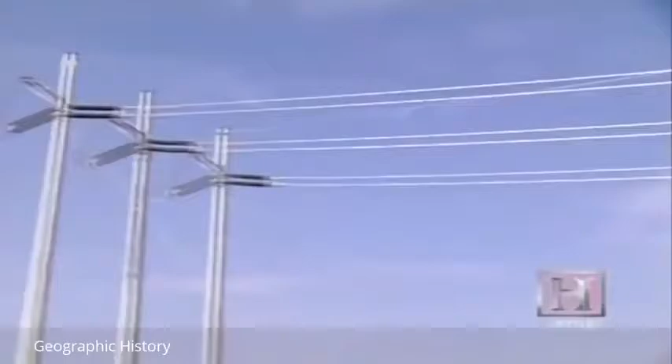Over the next century and a half, we took a world which had dominated us and transformed it into this: an electrified environment which responds to our every need. We control our climate, process information, and tend to our health with power that flows hundreds of miles across an interconnected transmission grid that encompasses the entire country.

Electric current, the flow of charged electrons, intimately influences how we live, yet most of us understand little about how it works.

In 600 BC, the Greeks first discovered that static electricity could be generated by rubbing amber. It wasn't until the 18th century, however, that Benjamin Franklin theorized that electrical fluid might be composed of particles. By harnessing this flow of electrons, or current, inventors and industrialists more than a century later laid the foundation for what would become the colossus of electrical generation, the modern power plant.

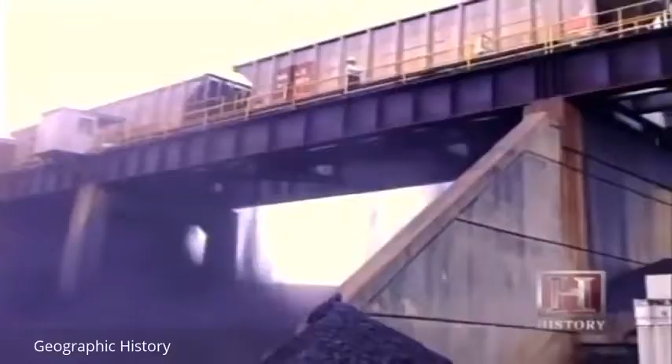It can be anything from a red-hot behemoth that, once started, consumes trainloads of coal without interruption for years. Or it might be a nuclear plant, incongruously perched at the edge of the shimmering Pacific Ocean, a plant that on its own produces 20% of Southern California's energy.

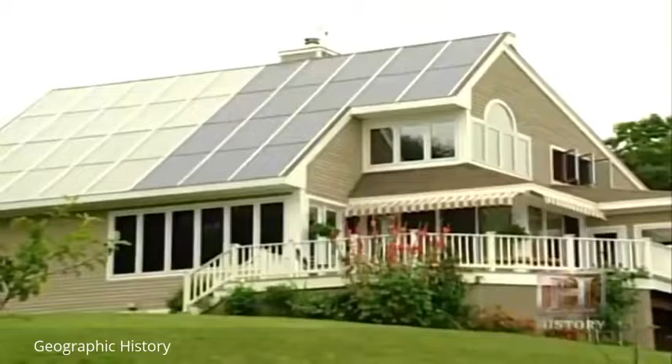Or maybe it is simply this: a house that generates more energy than it consumes and returns that surplus to the electrical grid for public use. A new model for the future of power plants.

But whatever guise contemporary power plants take, the basics of their design and their integration into commercial and domestic life were forged more than 100 years ago in a conflict between two giants of industry and invention, Thomas Edison and George Westinghouse. The outcome of the fierce competition between these two men would ultimately dictate how electricity would be generated and transmitted. But their first battle would be waged over how to bring safer light to the cities of America.

Early natural gas lighting systems in homes, for example, on occasion were quite dangerous. They had no shut-off valves, so if the lamp went out, the gas would continue to accumulate in the home, and they had some major explosions in homes.

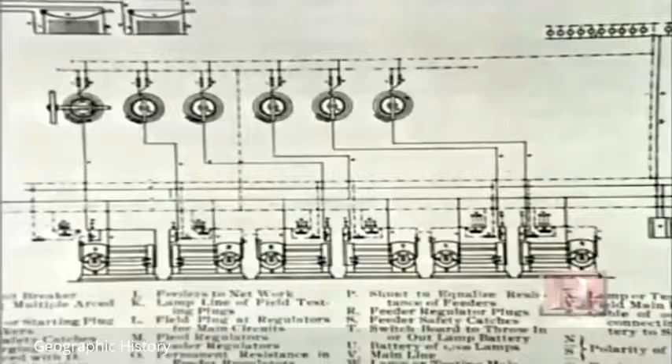In 1879, Thomas Edison invented the first commercially practical incandescent lamp with a high-resistance filament that glowed when heated by a low current. He soon followed this with designs for a complete distribution system for light and power.

On September 4, 1882, after delays and cost overruns, Edison opened the first electric utility, the Pearl Street Station, in the heart of Lower Manhattan's financial district.

Edison knew that his product was going to be expensive and would need to reach many customers. The whole reason for Edison's Pearl Street Station in New York City in 1882 was to demonstrate that electric technology could be used on a widespread basis, not serving one customer like steam engines in old factories, but many, many customers. Edison's choice of direct current technology at Pearl Street limited his power plant's range.

The major disadvantage to direct current power in power plants at the time was you could not transmit electric power very far without losing a tremendous amount of the current. So you needed a power plant every half mile or mile throughout the city.

Edison's main competitor, George Westinghouse, saw that electricity's future was in long-distance transmission. Westinghouse put his company, Westinghouse Electric, to work at perfecting a system using alternating current, which flows in reversing waves that propagate more easily and with less resistance in a transmission wire.

The beauty of alternating current is that you can generate it at a very high voltage and then step it down essentially to any voltage that you need. So you could step it down to a very low voltage that somebody would need at a house for their lighting, or you could step it down to a somewhat higher voltage that some business or some factory would need.

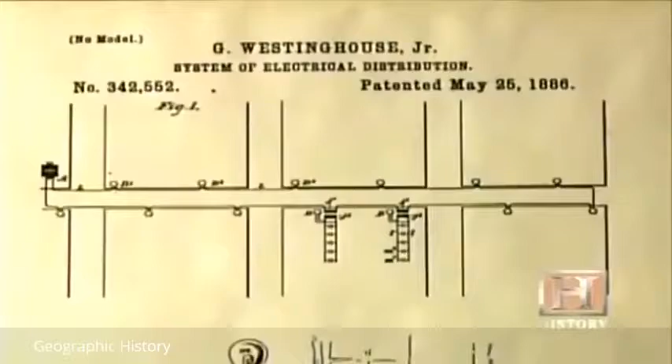George Westinghouse purchased several vital alternating current patents from Nikola Tesla, a Serbian-born inventor. Westinghouse recognized Tesla's genius and brought the inventor to Pittsburgh to work for him. Together, they designed the components necessary to alternating current's success.

In 1887, George Westinghouse invented a meter for alternating current. He thought if you were going to make alternating current commercially available, you were going to need some way of measuring what you're going to sell to your customers.

Westinghouse's aggressive pursuit of alternating current technology put him in direct conflict with Edison. It was a battle of business and technological giants, Thomas Edison versus George Westinghouse. This is called the Battle of the Currents, and it was essential because the technology that won would dominate the industry for the remainder of the foreseeable future.

With so much at stake, it's not surprising that the Battle of the Currents took a bitter turn. Edison went so far as to lobby New York State officials to have his competitor's product, alternating current, used to execute condemned men at Sing Sing prison.

I guess perhaps the lowest blow is when they were looking for a word to describe this. Today we say a person is electrocuted, but at the time they didn't have a term, and Thomas Edison suggested that they use the word Westinghoused, that the condemned man was Westinghoused. And obviously it's very, very upsetting to George Westinghouse.

But Westinghouse focused on the industrial competition at hand and left the courting of public opinion to his adversary. There was a great World's Fair coming up in 1893 in Chicago, and they asked for proposals to illuminate the fair, to light it at night, realizing that nowhere in the world had a major event ever been illuminated at night before. Westinghouse bid $500,000, half of what Edison bid, and was awarded the contract.

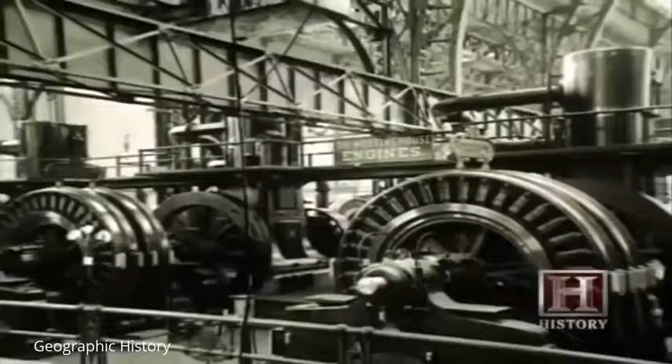He took advantage of the opportunity to promote his product, installing a complete alternating current power plant that was on display for everyone to see. It had a giant Westinghouse alternating current switchboard, and the impressive part of that was that there was only one operator. One operator could control all the electrical equipment for the World's Fair of 1893.

27 million Americans and foreign visitors attended the Chicago World's Fair of 1893. Tesla and Westinghouse made sure that they left the fairgrounds with a good idea of who was winning the Battle of the Currents. Both George Westinghouse and Nikola Tesla realized this was an opportunity to really showcase the potential of alternating current. One display had this huge word, power, and at night there were electrical currents, just like little bolts of lightning flashing all around this illuminated word.

After this dramatic success, Westinghouse was prepared for his greatest challenge, competing head-to-head with Edison for the right to build the largest power plant in the world.

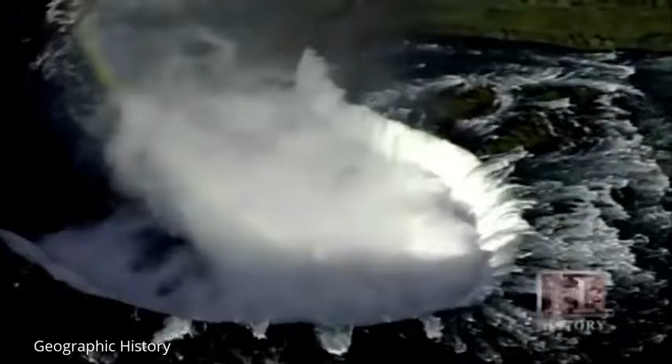Niagara Falls. For hundreds of years, men had understood that the power of falling water could be converted into mechanical energy, the energy to run mills. But by the 1880s, there was open debate over whether the falls should be harnessed with this old technology or transformed into electricity and transmitted to industry and individuals hungry for power.

If we look at Niagara Falls and the potential for generating power, it was obvious to a lot of intelligent men at that period of time that there was a tremendous amount of power in the water coming down over Niagara Falls. If it could be harnessed, it could do great things for industry.

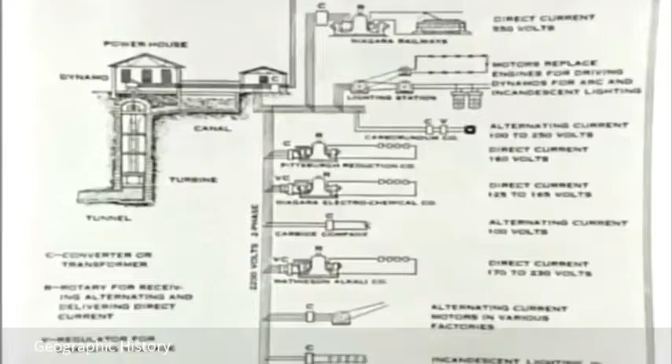The International Niagara Commission solicited plans from leading engineers to design a plant that could transmit electricity to nearby Buffalo's manufacturing interests. This was a dramatic opportunity for George Westinghouse's alternating current system. Ultimately, the decision to choose alternating current, which could be pushed much further distances over transmission lines from the powerhouse, won the day for alternating current.

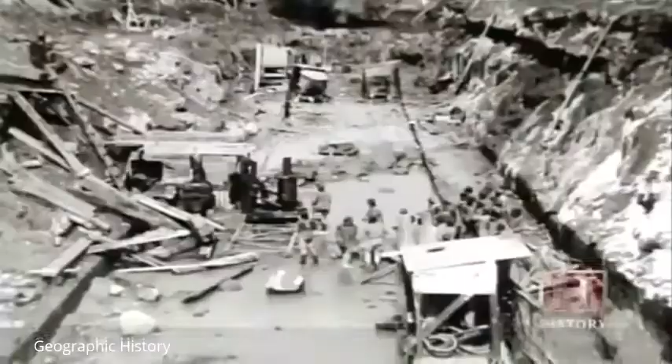It took from 1892 to 1895 to build the tunnel that would divert the force of the Niagara River to the plant's turbines. During the summer of 1894, electric cranes eased the 29-ton turbines, the largest built to date, into the wheel pits. The turbines were essentially windmill blades that could be driven by the force of Niagara's water.

When the plant was finished, water flowed through the forebays and into the penstocks, vertical pipes about 8 feet in diameter, before entering and driving the turbines, which in turn spun rotors beneath the generators. Inside the generator, a magnet spun, creating a magnetic field which induced an electric charge in a casing of copper coils, thus producing electricity.

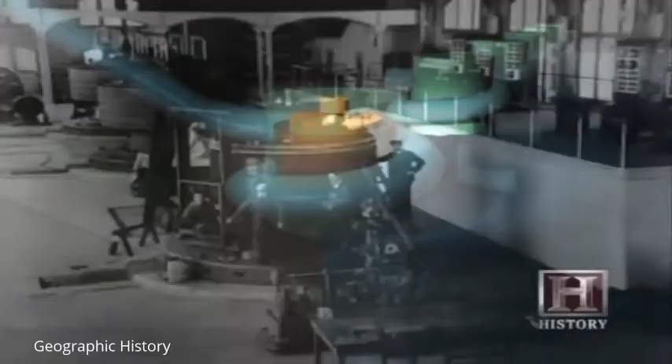In 1896, the Niagara Power Station began transmitting power 17 miles to Buffalo, New York. But it wasn't until 1901 at the Pan American Exposition on the Buffalo Fairgrounds that the general public was able to witness a large-scale display of the wonder of long-distance electrical transmission. In order to transmit electricity over this distance, transformers at the plant increased voltages to 11,000 volts, 4 times the voltage of an 1891 plant that Westinghouse had built.

Inside a transformer, an electric charge passes through one wire coil, inducing a higher or lower charge in another separate coil. Voltages multiply at the ratio of the number of turns in the secondary coil to the number of turns in the primary coil. What the Westinghouse engineers understood clearly was that large power plants, which could produce large amounts of electricity and serve larger numbers of people over a wider area, needed transformers to increase the pressure of electricity, to push it longer distances.

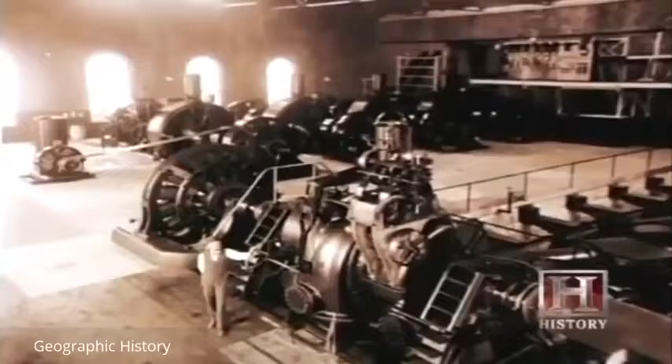The Niagara Power Plant provided not only a technical blueprint, but also an economic model that would be duplicated time and again over the coming century. If you build it, they will come. Heavy industry, in this case, would congregate around a reliable, cheap energy source.

There was a fellow in Pittsburgh named Hall who had an early process for producing aluminum using electricity. So he moved his company from Pittsburgh to Niagara Falls when the power became available. That company went on to change its name to Aluminum Company of America, and as we know today, it's the largest aluminum company in the world.

It soon became clear as electricity flowed out of the Niagara Power Plant that alternating current was here to stay. After Niagara, even Edison abandoned DC for AC technology. I think it would be fair to call George Westinghouse the father of the modern power plant. He was the catalyst, the person who had the commitment over this 10-year period of time to pull the resources together to make alternating current successful.

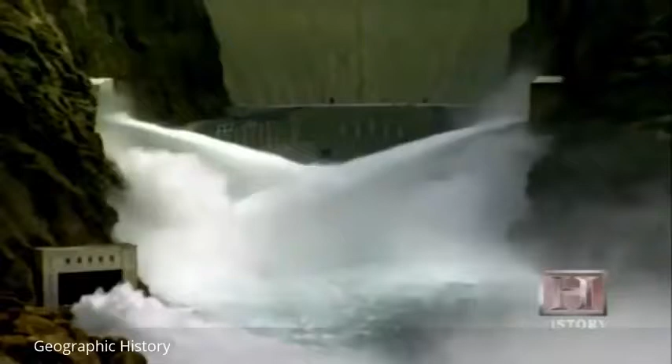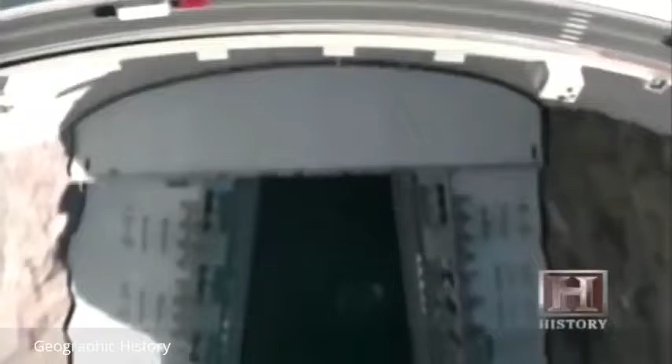In the ensuing decades, improvements in the electrical engineering of turbines, generators, and transformers would lead men to dream of a bigger and better source of water power. This dream would culminate at Hoover Dam, 40 years after the first electricity flowed out of Niagara. At 726 feet in height, weighing in at 6.5 million tons, and forming a 150-mile lake, Hoover represented a stunning increase in scale to Niagara and is still one of the world's largest dams.

Hoover's transmission voltage of 287,000 volts speaks to the engineering leap that had taken place. A number of people compare Hoover Dam with the earlier Niagara Falls installation. The difference between the Niagara Falls of the early 1890s and Hoover Dam in the mid-1930s is the improvements in technology over that period of time.

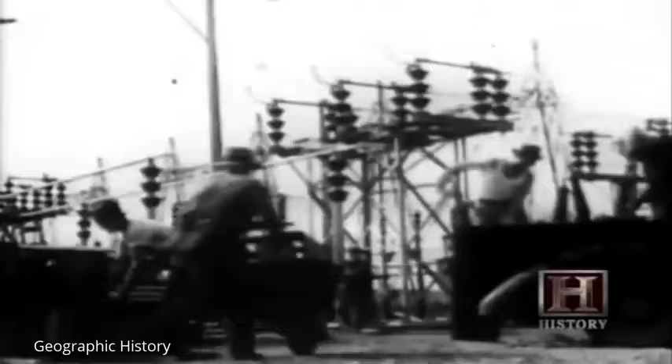Larger, much more efficient generators, and most importantly, very high voltage, high pressure transmission systems. Whereas people 17 miles away from Niagara Falls could receive electricity in the early 1890s, by 1936 and 37, when power was coming out of Hoover Dam, it was traveling over 250 miles to Southern California.

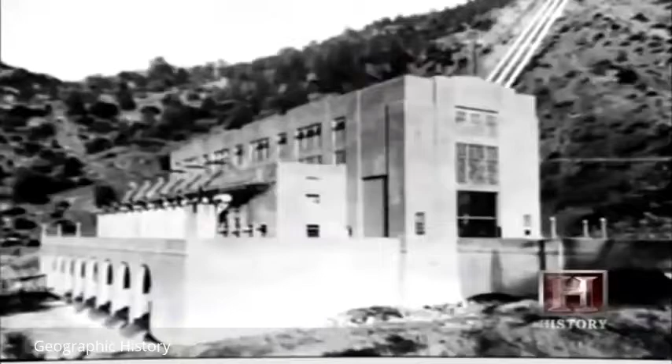In the decades between Niagara and Hoover, privately owned power companies flourished throughout the country. It did not take long for company owners to realize that consolidation was the only way to profit in an industry that required so much investment to build infrastructure.

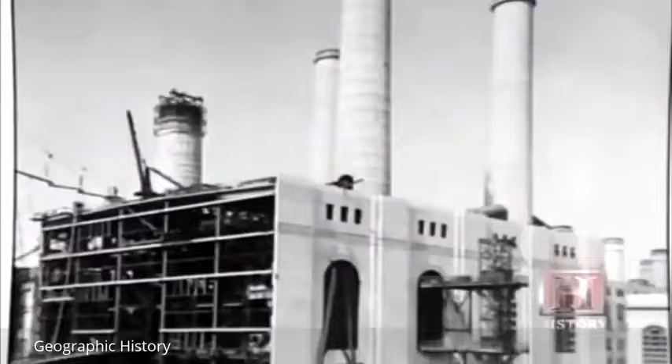Tom McCarter had been the Attorney General of New Jersey. His idea, which was very novel at the time, was to draw a line between New York City and Philadelphia and buy up all the municipal light, gas, and traction companies that existed between those two major points. By doing so, he was able to generate the critical mass necessary to go out and begin to fund the tremendous infrastructure that was going to be required to build the electric system.

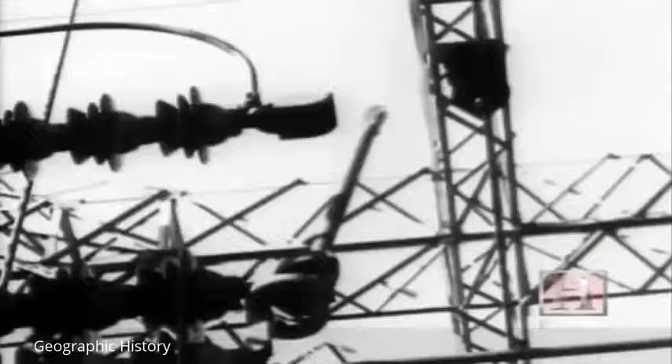It was also a major step in the growth of the transmission grid. More customers meant greater revenue. An expanding utility could afford the expense of running transmission lines, linking multiple plants into a regional grid. This system spawned the giant interstate power transmission grids that today cover thousands of square miles.

Improved transformer technology and higher voltages meant electricity could be sent farther and farther. By 1903, you had over 100,000 volt technology, which meant you could push electricity 150 miles or more. By the early 1920s, you had 220 and 230,000 volt technology, which meant literally anything within a range of about 300 miles of the power plant could receive electricity.

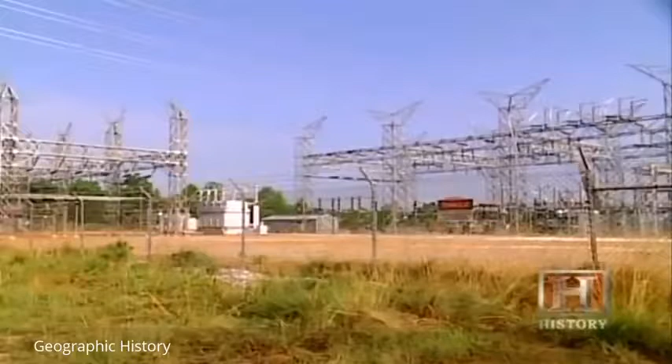The workhorse of this grid is the transmission substation, like this one outside Athens, Georgia, where the job of increasing and decreasing voltages is done.

Our network grid system is based on about 3 main voltages, and then we go to some lower voltages for shorter routes. But the network system is basically 500,000 volts, 230,000 volts, and 115,000 volts. The 500,000 volts is basically like an interstate system. It travels from state to state, and there are about 5 to 6 main arteries across the state. The 230 kV system is sort of like the U.S. highway system. There are more routes, but still not the largest number.

There's the largest number, the 115,000, which is more like the state highway system. It carries power from town to town, all over the smaller towns, medium-sized towns, and to other areas to feed different loads.

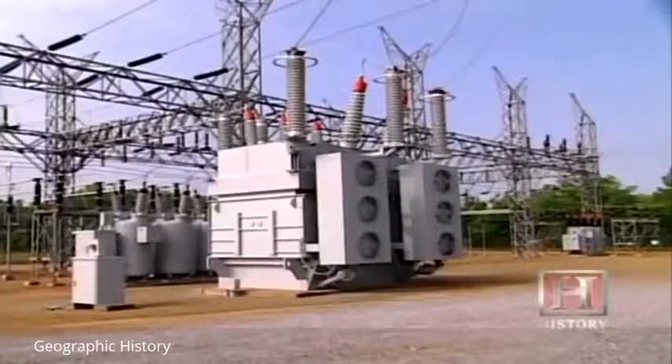Transformers at the substation alter the voltages so that electricity can be routed where it needs to go. We're standing in front of the 230 to 115 kV transformer, the big box here. The transformer converts the 230 kV voltage down to 115,000 volts, and then supplies power to the 115 bus, which is then shipped out across the 115 kV grid.

Electricity flows along the 115 kilovolt power line and gets stepped down as it nears its destination, private homes. This is a typical distribution transformer serving a home. Distribution lines run either 12,000 or 25,000 volts. It's stepped down to 120 to 240 volts to feed the house for the normal television, lights, appliances, everyday use.

This kind of everyday use has fueled the demand for power throughout the century, as consumption and desire for comfort have grown. To meet society's runaway electrical needs, utilities built their bread and butter plants.

Next, what eats 36,000 tons of coal a day and never needs a rest? On 2,000 acres in Bartow County, Georgia, sits the second largest coal-fired plant in the United States, Plant Bowen. Owned and operated by Georgia Power, the facility produces in 15 seconds all the electricity a home will use in a year.

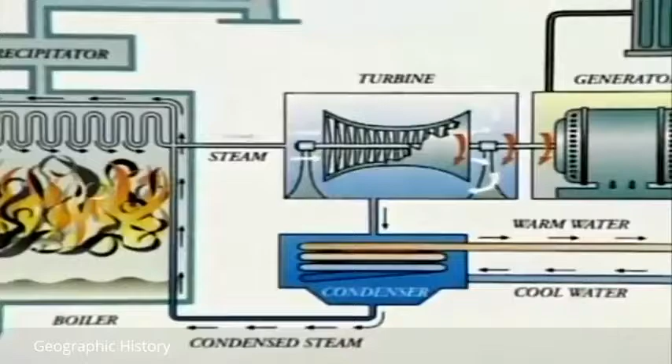Basically, the way you generate electricity: you take water, and the simplest cycle is you boil it, and you create steam, and you pressurize it with this amount of heat that you're introducing into it, and you put it through a turbine. The turbine is a simple fan, and as you introduce the high-pressure steam, it turns a generator.

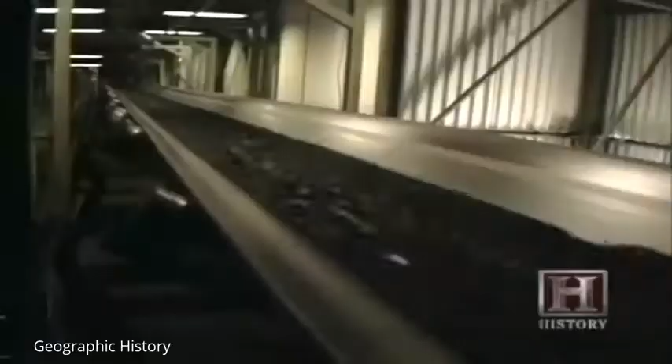But this simple steam cycle was wasteful. It would take about 10 pounds of coal to produce the amount of energy that it would take to light a 100-watt light bulb for an hour. That's a very significant amount of coal. Today, through technological changes, we've been able to bring that down to where now we're far under 1 pound of coal to produce the same amount of energy.

It took a combination of disciplines to affect this kind of fuel efficiency. You had the power plant engineers refining that process, increasing the thermal efficiency, finding out how to use fuels in a more efficient way. You had metallurgists working on piping that were trying to bring temperatures up higher. You had boiler feed pump folks working on producing tremendous amounts of pressure. All this to supply energy to a growing population and industrial base that demanded more power.

Engineers call this demand load, and this load changes depending on the season and time of day. Load is the electrical demand on our system. If you turn a light bulb on, that is putting a load on our system. It's putting a demand for the use of electricity.

The use of power goes up dramatically during the day, particularly today with air conditioning, so that you have very low levels of load at 8 o'clock in the morning. It goes up higher and higher in the morning period, and then about 3 o'clock in the afternoon, everybody's air conditioning is working at its maximum, industry is working hard, and that's the maximum peak load.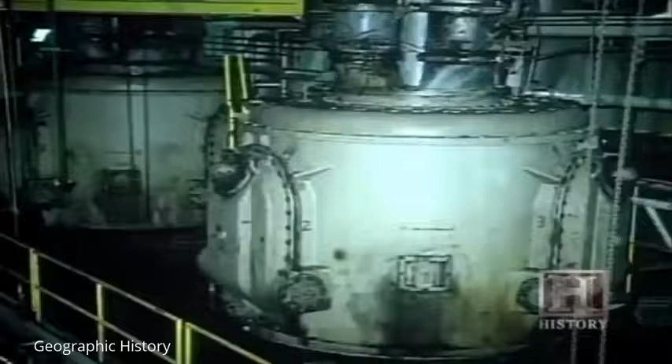Plant Bowen is what we call a base load power plant. The economics of operating it are such that it pretty well runs day in and day out, 24 hours a day. It takes 4 9,000-ton train loads of low-sulfur coal arriving from eastern Kentucky each day to supply the plant. The coal is pulverized to the consistency of talcum powder before being blown into the boilers to be burned to heat water.

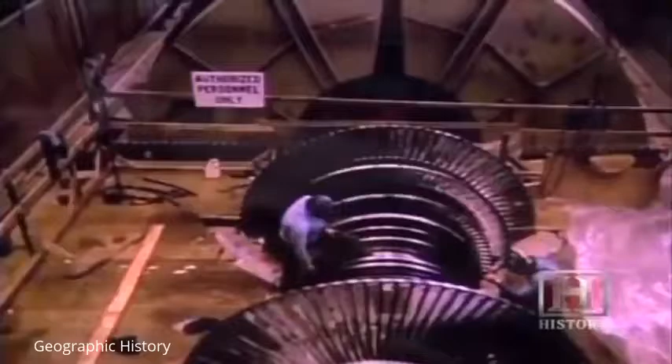It's turned into steam that has a temperature of 1,000 degrees and a pressure of 3,500 pounds per square inch. This steam is delivered to a turbine, which turns the turbine. The turbine is attached to a generator, and the generator and turbine spin at 3,600 RPMs, generating electricity which we put out on our transmission line.

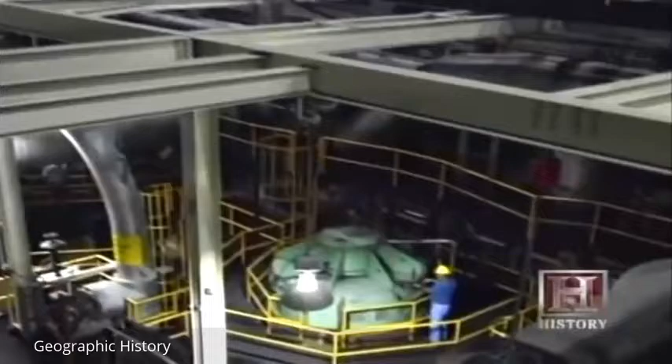Once the steam has done its work in the turbine, it enters the condenser, where it flows over 36,000 copper tubes containing water from the nearby Etowah River.

The river water absorbs heat, condensing the steam back into water so that it can be reused in the boiler. Hot river water is then cooled in 400-foot high cooling towers, each tower cooling 300,000 gallons a minute.

Not surprisingly, it is no longer possible to find communities who will welcome a plant of Bowen's scale, with its looming 1,000-foot high stacks.

As a result, utilities like Georgia Power have developed peaking facilities with much smaller footprints, both in terms of land use and environmental impact. Combustion turbine plants like Plant Dahlberg in northeast Georgia burn natural gas or fuel oil instead of coal, in what is essentially a souped-up jet engine.

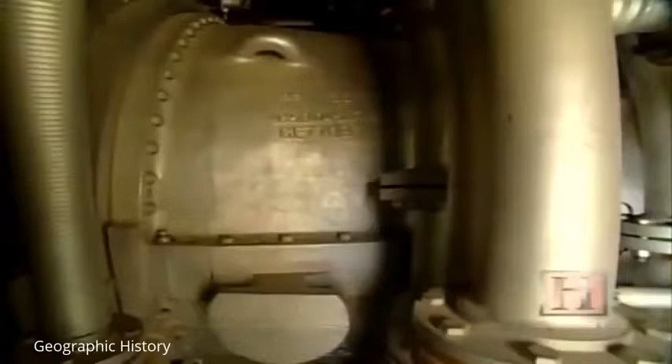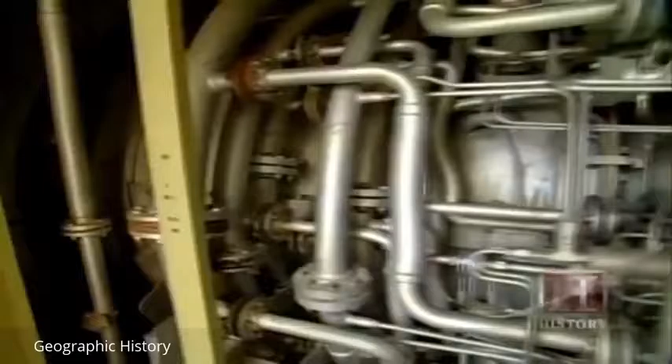The gas turbine engine uses hot air and not steam to produce electricity. Fuel mixes with air, is burned, and the expanding gases drive the turbine. Once the turbine spins, the process is much the same as in a steam cycle plant.

The technology for this type of unit with the combustion turbine is very similar to what you would see on a jet engine. The jet engine has a compressor that brings air in, compresses it, burns it, and produces the power used in thrust. This is a much larger machine doing the same thing. It's been equated to a jet engine on steroids.

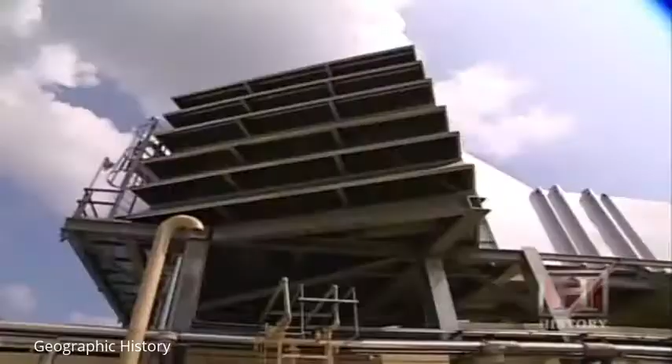Plant Dahlberg's 8 units combined produce about 600 megawatts of energy, less than the output of a single unit at Plant Bowen. As a result, the turbines are only used to produce supplemental electricity when it's needed, to get you through the high demand period of the day.

Today, the energy market and societal pressures for safer, cleaner power have created a demand for smaller plants that are more evenly distributed on the landscape. This is changing the shape of an industry whose motto had always been, bigger is better.

Built during the years that preceded the Depression, those bigger plants produced more power, but in the 1930s and 40s, rural farms had no way of tapping into that power. Remote, and expensive to reach with transmission lines, they simply were not on the grid.

Investor-owned utilities primarily did not want to go to the cost of providing electricity to rural customers, because you would face the cost of building power lines, in some cases 100 miles long, that would only serve maybe 4 or 5 customers. No return on your investment.

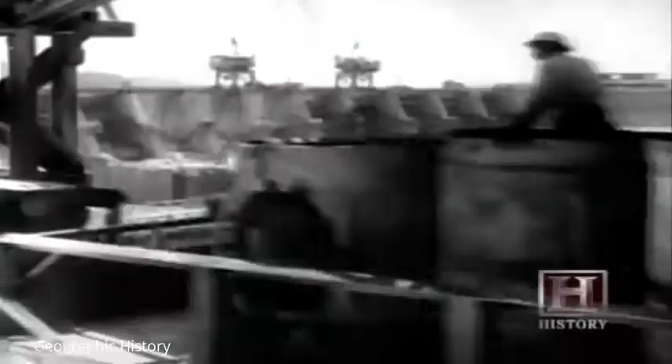President Roosevelt and the Congress established the Tennessee Valley Authority in 1933, and the Rural Electrification Administration in 1935. The agencies shared the goal of bringing electricity to rural America, where only 10% of farms had power.

The TVA ostensibly began as a flood control effort by the Army Corps of Engineers, but it was quickly used as a way to find new sources of hydroelectric generation on the rivers of the area. Dams were built, ultimately totaling 42 in the system, and a massive hydroelectric power project was launched, which grew to a total capacity of 4 million kilowatts by the 1970s.

By this time, the mission of the REA and the TVA had been accomplished. 98% of all farms in the United States had electric service.

Once the TVA had exhausted the hydroelectric possibilities of the river basin, administrators turned their attention to other forms of power. In later years, the TVA moved away from its hydroelectric base and actually was a pioneer in the scale-up of some of the coal-fired boiler technology that we see today, and became a diehard proponent of nuclear power in the 50s and 1960s.

Next, the half-life of nuclear power. How a technology grew up and got old before its time.

In 1942, Enrico Fermi created the first self-sustaining nuclear chain reaction in a lab hidden beneath the football field at the University of Chicago, and in doing so, launched the atomic age.

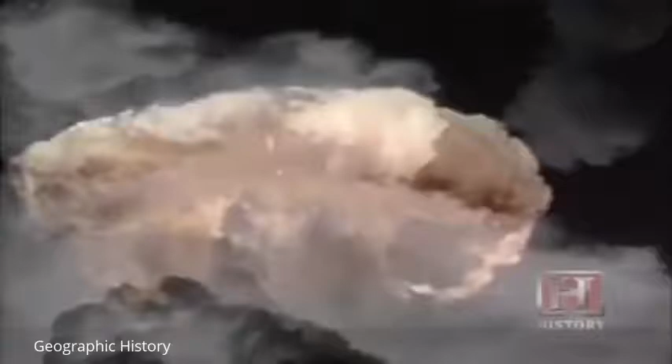In an atom bomb, a sufficient quantity of weapons-grade plutonium is imploded by a TNT charge, initiating a chain reaction, or fission explosion.

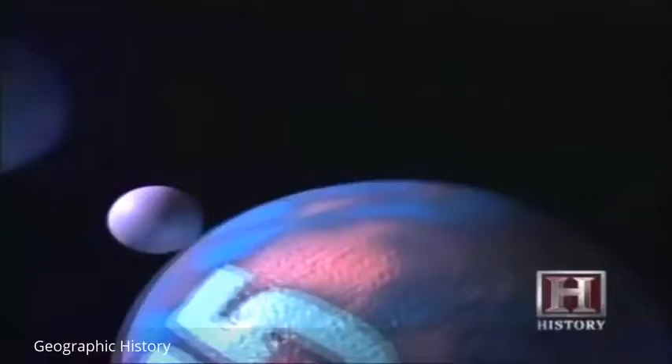Fission is the process in which natural elements that are radioactive in nature, like uranium, are bombarded with neutrons, and they split into other elements. When they split into other elements, they release energy.

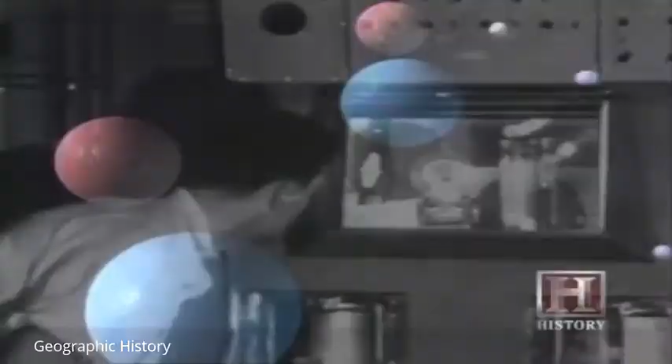Fortunately, not all nuclear reactions end in devastation. It was the peacetime harnessing of atomic energy that spawned the nuclear power industry. The first privately financed and commercial nuclear power plant built without government help was the Dresden 1 facility outside of Chicago in 1959.

If you think of the Manhattan Project and the atomic bomb and the ending of World War II, the advancement in that technology over a 10 to 15-year period was pretty dramatic. Today, more than 100 nuclear power plants are operating in the United States, supplying 20% of the country's energy needs.

San Onofre is what we call a baseload power plant, which means it tries to operate 24 hours a day, 365 days a year at full power output, which in the case of each of these reactors is a little over 1,100 megawatts of power. The San Onofre Nuclear Generating Station in California's San Diego County supplies energy for 2.5 million homes and businesses.

Fuel is uranium. Uranium has the natural ability to fission, which means the nucleus of the atom of uranium can literally tear itself apart. When it does that, it releases a tiny amount of heat, but it also releases additional neutrons.

Inside a pellet of uranium, there would be billions and billions of atoms. So in very short order, we can get a chain reaction going in the uranium. So when you have a billion atoms releasing a little bit of heat, it becomes a large amount of heat.

This heat is released inside the nuclear reactor, which is housed inside a containment dome. The walls are 4.5 feet thick concrete and steel, and in theory would be able to survive any man-made or natural disaster, including earthquakes. In this stress test, the wall withstood a direct impact of an F-4 Phantom jet.

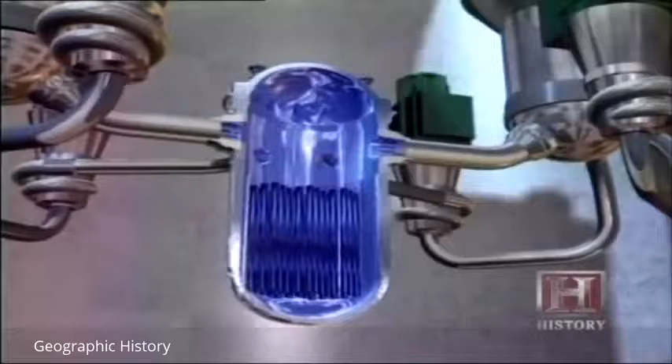The reactor and its circulating system are filled with water, which submerges the fuel core. If you were to put a thermometer on the core, the fuel assembly itself, it would be in excess of 600 degrees. As the water circulates by that hot uranium, the water gets hot, it comes out the other side.

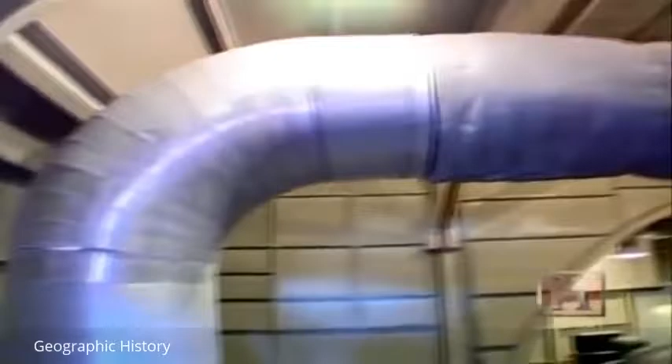It goes into two very large devices called steam generators. The steam drives the mechanical turbine, causing it to rotate at 1,800 revolutions per minute. That in turn turns an electric generator, and electrons are forced through wires, making electricity to power homes and businesses.

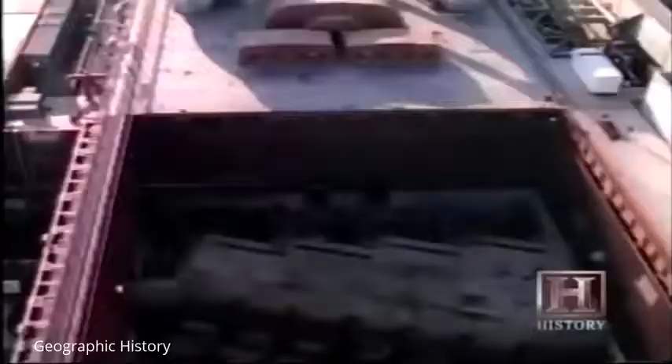The row of turbines and the generator together weigh in at 800 tons, or the equivalent of 800 Volkswagen Beetles. But despite this massive scale, it's still a fundamental process.

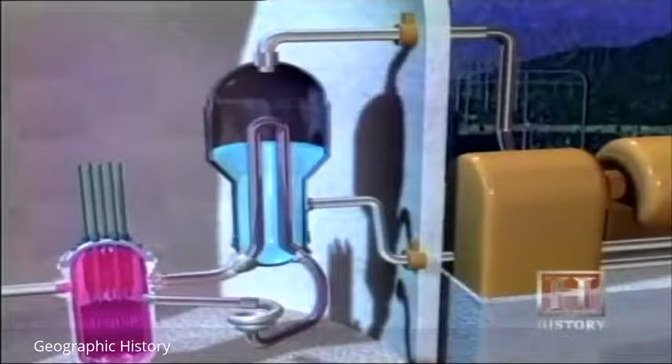As radioactive water from the reactor flows through the steam generators in a closed system, it heats clean water in a second closed system before it returns to the reactor. The clean steam drives the turbine and is then cooled by ocean water before returning to the steam generator, where it will again be turned into steam.

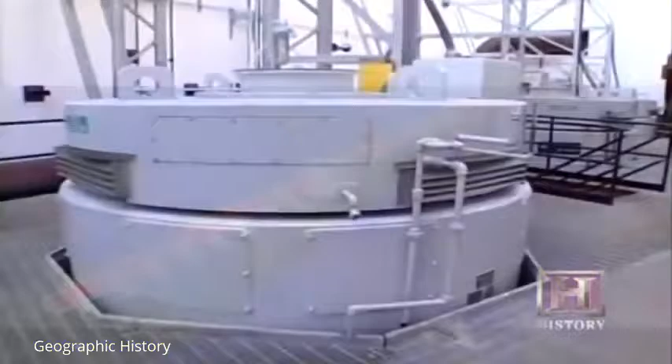Behind me over here, obviously, is the Pacific Ocean. About 3,200 feet offshore, we have a 16-foot diameter pipe in the ocean. When we turn on the pumps, we draw in about 1.6 million gallons of water per minute.

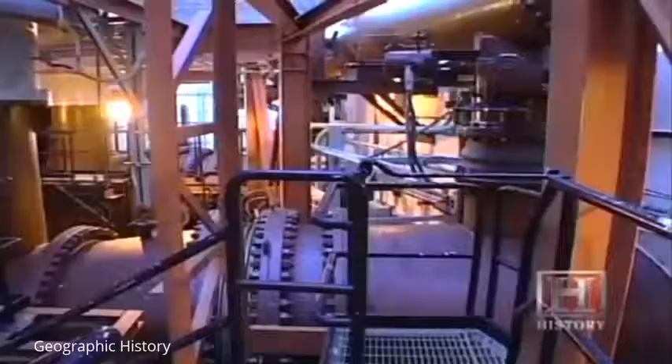The pumps are run by 4,000 horsepower motors. That's the equivalent of 6 NASCAR cars running at full speed. Each pump is capable of draining an Olympic swimming pool in 15 seconds.

If for any reason engineers needed to stop the nuclear reaction, they could do so by lowering an array of control rods into the core. The control rods absorb the atom-splitting neutrons that are driving the chain reaction, bringing it to a halt.

But the surprising aspect of this plant is that, to a great degree, it runs without stopping. It can run for 2 years without needing new fuel at full output. San Onofre Unit Number 2 has been operating for about 530 days consecutively.

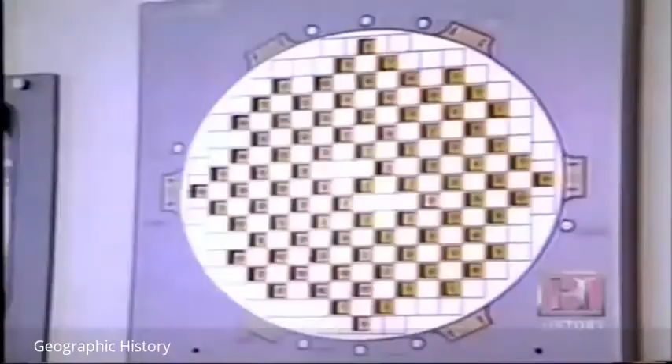If this was a natural gas plant or an oil plant or a coal plant, we'd constantly be needing to bring in trains or pipelines bringing in this fuel product.

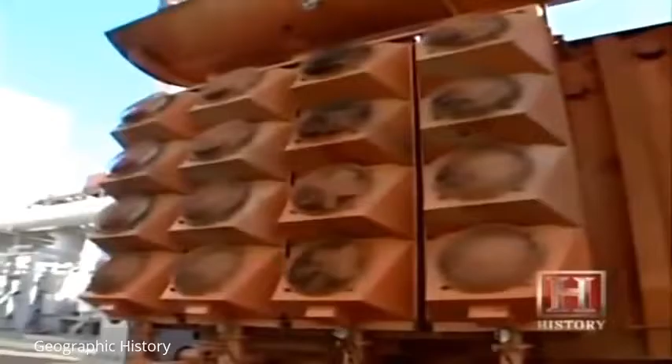Outside, transformers step 22,000 volts of electricity up to 220,000 volts, essentially pressurizing it for transmission throughout Southern California.

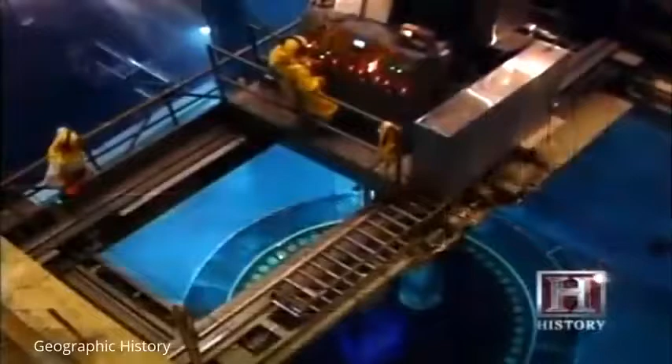Although nuclear power is a relatively new and seemingly successful technology, it has yet to recover from an accident in Harrisburg, Pennsylvania. The most significant event from a safety standpoint that has ever happened in the U.S. nuclear power industry was the Three Mile Island accident in 1979.

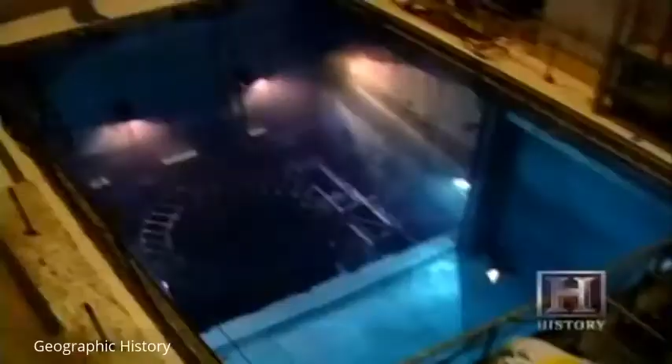This was literally a brand new reactor with brand new operators. At 4 o'clock in the morning, because of a combination of human error and mechanical design, they allowed the reactor's core, the uranium, to be uncovered for several hours. Without any water to keep the uranium cool, the uranium overheated and actually melted.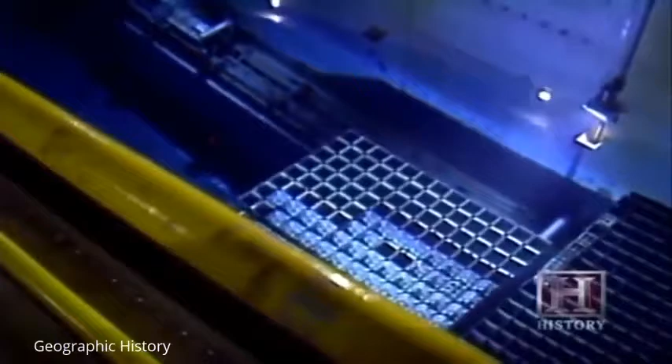Evidence suggests that fallout from the accident was low, but the public relations setback was immense. No new plants have been built since.

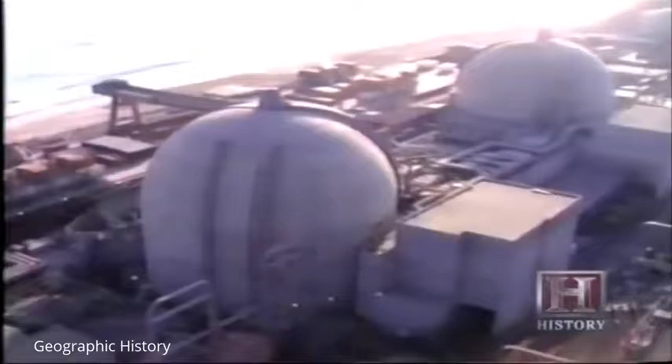However, most nuclear power advocates predict that the industry will stage a comeback. In my opinion, there will be a rebirth of nuclear power. It's not a question of if, it's a question of when. And proponents suggest the question of what kind of waste we want in our environment may well be nuclear power's most convincing argument.

Nuclear power in the United States supplies about 20% of the electricity in the whole United States. That would probably surprise most people that it's that high. In that 20%, that avoids, on a yearly basis, the emission of about 177 million metric tons of greenhouse gases that would be emitted into the atmosphere if that 20% nuclear power was replaced, say, with coal or oil.

I would say that in the next 10 to 20 years, you will see the percentage of nuclear power rising, because that's a good way to address the global warming issue, and you do not have any solid waste other than the radioactive waste that you have to deal with. But I feel like we'll figure out a way to manage that problem.

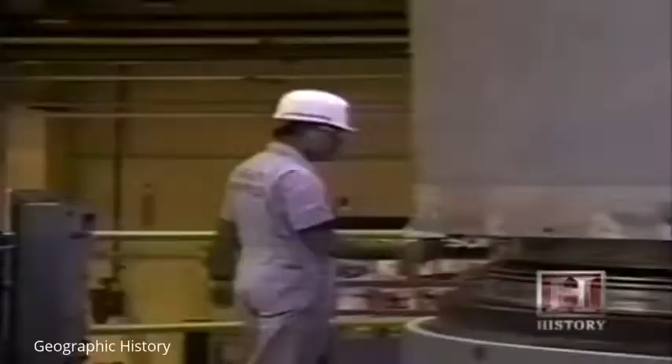Perhaps. But the 3,000 tons of spent fuel that the industry produces each year has no permanent home and is simply being held at the nuclear plants that produced it. Since this waste will remain radioactive for thousands of years, it's not surprising that most elected officials continue to say, 'Not in my backyard.'

Next, electrical consumption grows as interest in conservation wanes. How will power plants of the future meet the demand? Although the history of power plants is largely one of growth and technological triumph, the future of electrical generation could not be more uncertain. What is clear is that we have come to a crossroads where environmental concerns, unchecked consumption, and technological limits meet. The size of a power plant really has capped out at about 1,000 megawatts.

And I was thinking about why that's really the limit. The boiler in a coal facility right now is the size of an apartment building. It's 11 stories high. Right now you've got turbine blades that in some cases are 14 feet long. And the tip speed of something 14 feet long rotating at 3,600 RPM starts to get supersonic.

Today, the country's electrical needs are supplied by regional interconnected power grids that in theory ensure that power flows where and when it is needed. In practice, these grids are straining to meet demand.

It's really a series of regional grids at this point. I mean, theoretically, you can move power from Texas to California. However, there might only be one really good path to do that. But ideally, you would want to have more options than that.

The lack of options in routing electricity is further complicated by heavy demand in summertime that is beginning to cause power shortages. It's an issue of generation. It's an issue of not having enough kilowatt hours in the system. And it's occasioned by catastrophic failures at a facility or even small problems that take it offline for several hours.

The flip side of insufficient power generation is a countrywide lack of interest in energy conservation. I see probably less emphasis and care about energy efficiency today than I ever have. I can't even get people that I know to turn off their lights when they don't use them. Right here in my own office, I can't switch off the lights in individual rooms.

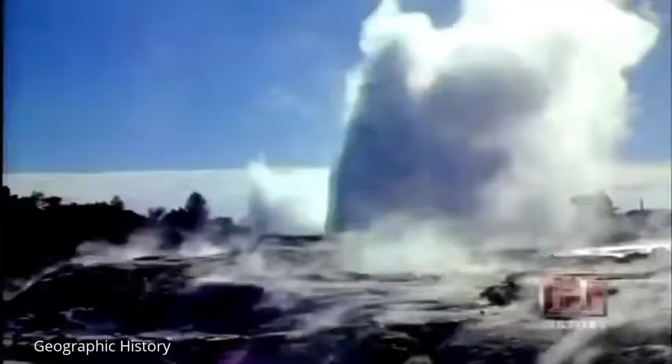But which one? The Earth's core is much hotter than the Earth's surface, fortunately, and the interaction of these temperature gradients comes very close to the surface in many parts of the world. That can be used to create a hot fluid or steam, which then drives conventional turbines.

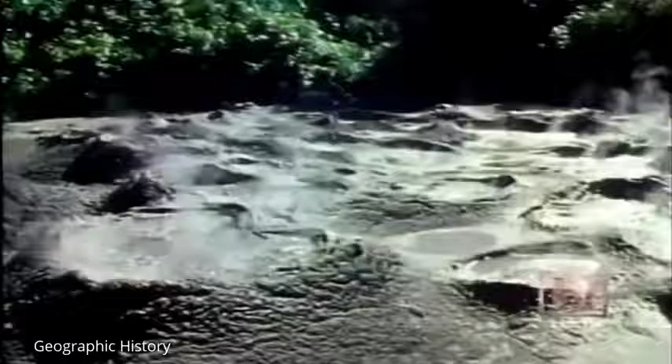At a geothermal plant, wells are drilled hundreds of feet below the Earth's surface into reservoirs with temperatures of 180 degrees Celsius or more. Although Mother Nature supplies the heat, geothermal sources like geysers are neither widespread nor clean, and are fraught with problems. First, it's tough to locate them. There is none in the Northeast that I'm aware of, so we have difficulty using it here.

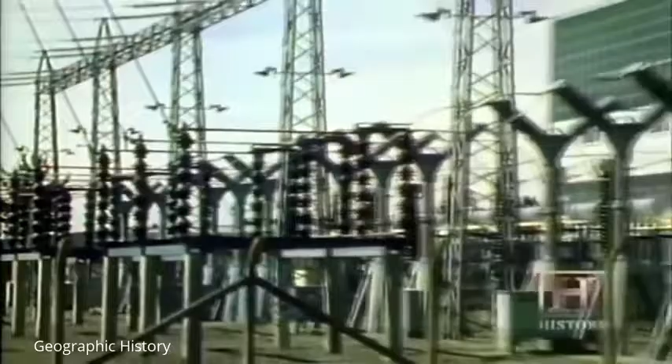With the geothermal facility, your primary pollutant is hydrogen sulfide. So the problem there is taking the hydrogen sulfide out, capturing it, and then finding some way to deal with it once you've captured it.

The most futuristic of technologies, fusion, combines two light atomic nuclei to form a single heavier nucleus. This generates heat levels similar to the plasma state of the sun. That's a dream for egomaniac scientists who figure that they can take the absolute most cataclysmic forces known to man and manage them.

There is, however, a less dramatic way to capture the energy of the sun: solar power. But the debate surrounding it is about efficiency, not safety.

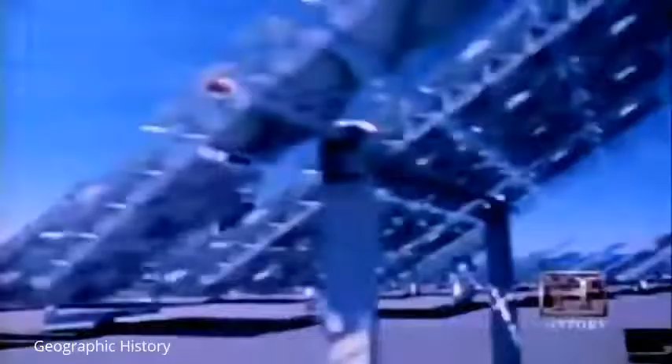Even in areas of the country where the sun shines a lot, like in the desert Southwest, the technology is still very behind in being able to supply the big base load plants like coal or nuclear plants. For example, to replace an average nuclear plant would take about 600 square miles of solar cells with today's technology.

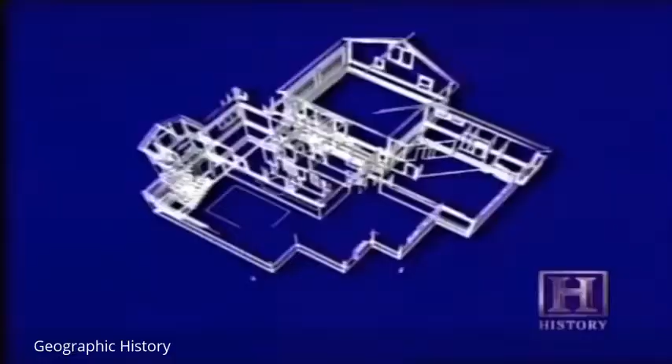A house on the Maine coast that generates more energy than it consumes. This house incorporates both solar thermal for space heating and hot water, and solar electricity for electrical production. The panels are integrated to form the finished weathering skin of the south roof, and the house exists in terms of its heating, hot water, and electrical energy requirements from the harvested energy that falls on the roof.

The house does more than just exist—it contributes to the energy needs of its community. Homeowner William Lord is quite proud of this fact.

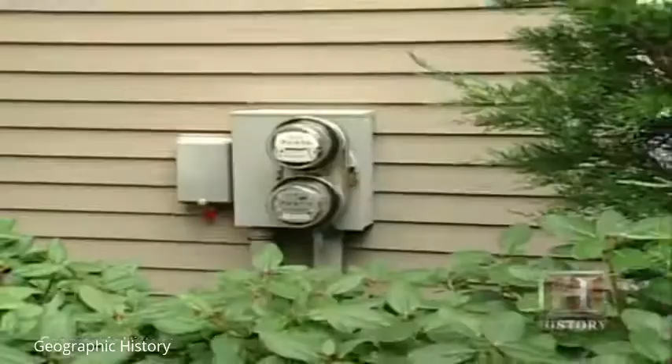We make most of our own hot water and all of our electricity. In fact, we generate more electricity than we actually use. So the process of fitting into the environment is seamless in our case and is not disruptive. Solar power not only makes environmental sense, but economic sense as well.

We have two meters on the house. One measures the excess energy that we export to the power company, and the other measures what energy we take from the power company. In Maine, we have something called annualized net metering, and the bottom line is that we essentially pay no electric bill annually.

When we built our solar house, we didn't realize we were actually creating an event. We added to that event a place where people come to learn about solar power—we have many visitors here. We added to that event our website. The Maine Solar House gets more than 1 million hits a year.

This month I'm taking a look at a house in Kennebunkport nearby. The former President of the United States, George Bush, has solar thermal panels on his roof. I think that's a great hope for everybody, because clearly that is probably the best way to produce power.

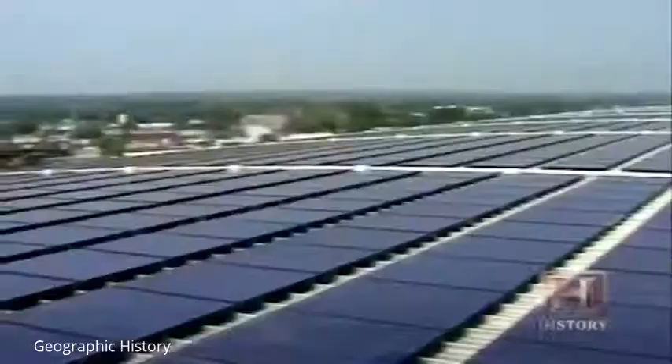Taking incident solar energy doesn't pollute anything. The direct conversion of solar energy into electricity with photovoltaics is the most environmentally benign method of making electricity. And so that, coupled with other conversion measures such as wind energy conversion and hydropower, can combine to gradually displace conventional systems to build a resilient energy economy based on renewables.

It's not a question of if, but when. And from my perspective, time is short. We should be investing the relatively plentiful and relatively inexpensive reserves of conventional energy to build this technology bridge to the future, because these are finite resources and they are not going to be here indefinitely.